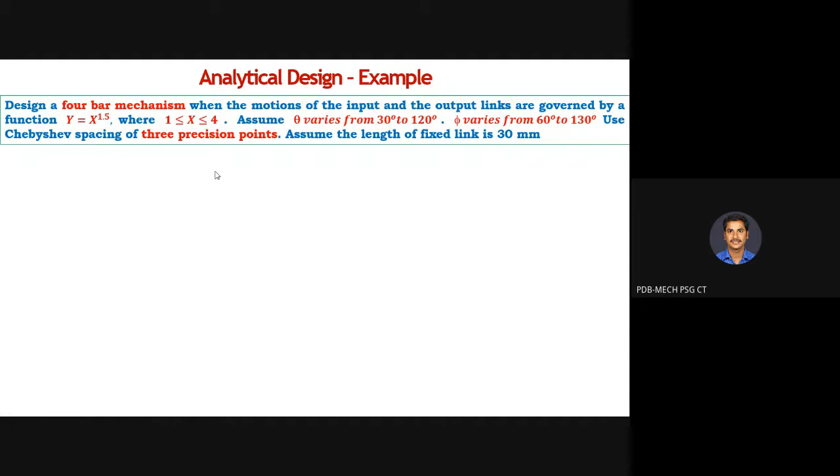Yesterday we discussed the Freudenstein equation for synthesis of a 4-bar mechanism using a function like y equal to x power 1.5, where x lies between 1 and 4. We completely solved this problem and got the solutions for the length of the links: crank, rocker, coupler and frame. Correct.

This is another problem. If possible, try it at home. Please make a note of this. Here, only the function is varying, that is y equal to 2x square minus x. That is the function varying, whereas other data is like x is varying between 0.

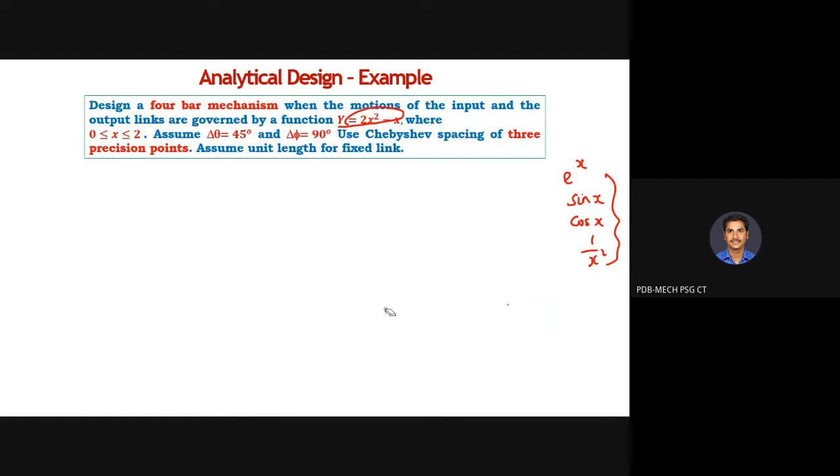It is very similar to the problem we have solved. Please make a note of this and you can try it at home.

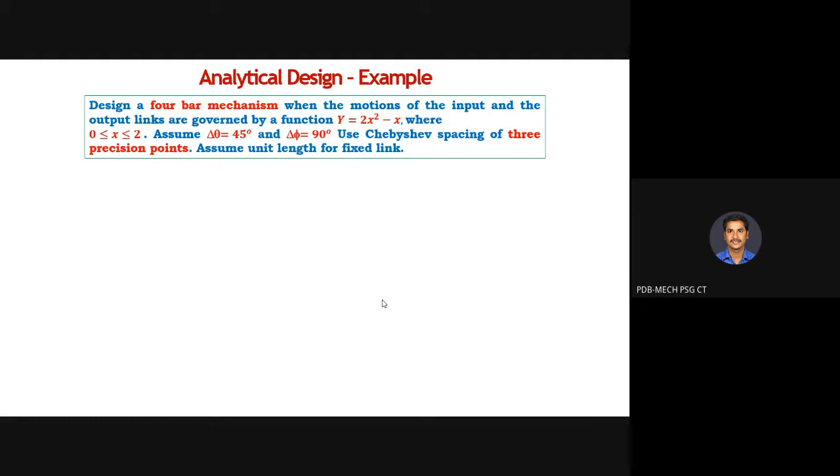Next, I am going to solve a similar problem related to slider crank chain, because the previous problem given for homework is also pertaining to 4-bar mechanism. So I don't want to waste more time solving the same 4-bar mechanism. Now we move on to a single slider crank chain mechanism, so you can get an idea how to solve those problems. Please read the problem carefully.

What is meant by slider crank mechanism? What is meant by slider crank mechanism? Please respond. What is meant by slider crank mechanism? In the inversion itself I explained.

Okay, what is a 4-bar mechanism? We have 4 links like crank, coupler, rocker and frame. So now can you define what is a slider crank mechanism? No response.

It has one slider and a crank with coupler. You can relate it as 4-bar mechanism and slider crank mechanism. Yeah, frame, crank, coupler and slider.

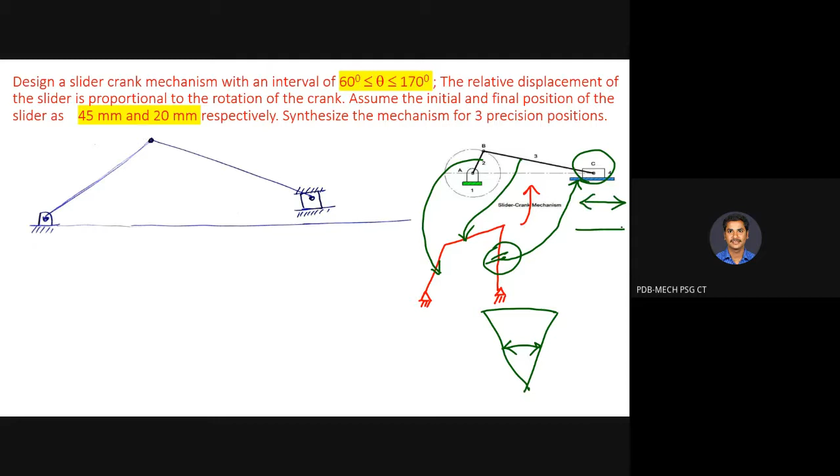That is the difference between the 4-bar mechanism and slider crank chain mechanism. So yesterday we derived a Freudenstein equation for finding out the length using the 4-bar mechanism. Now we move on to slider crank mechanism. Hope you understood what is meant by slider crank mechanism.

So here it is your crank, and it is your coupler, and it is your slider, and it is your frame.

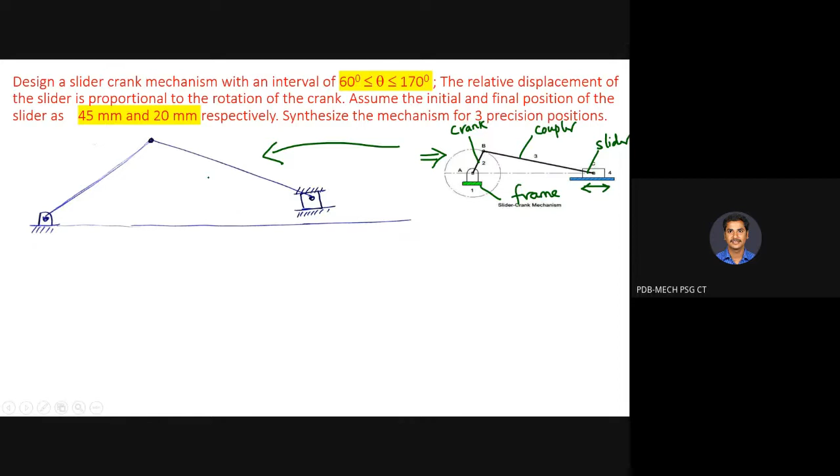So here you can observe, this is your crank, same problem - this is crank, this is coupler, this is your slider, and it is your frame.

What is the difference you are observing? Can you observe the slider is slightly shifted from the frame? Earlier in this case the slider is in line with the frame, correct? So this is the pivoting point of your crank with the frame, and this is the straight line. So in this case your slider midpoint is in line with the axis of your crank pivoting point with the frame, correct or not? So the point is in line. Yes sir. Okay, but what is the case in the actual problem?

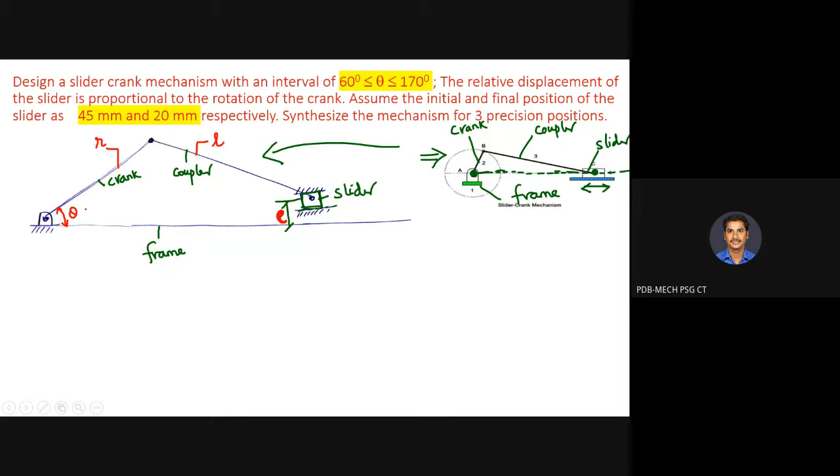Okay, so now what angle does your crank make with the frame? So some theta angle, let me denote it as theta. Normally in your 4-bar mechanism, theta is nothing but the input angle made by the crank, and phi is your output angle which is made by the rocker. Correct? Am I right or not? Yes sir, yes sir. Theta is your input angle made by the crank and phi is your output angle made by the rocker.

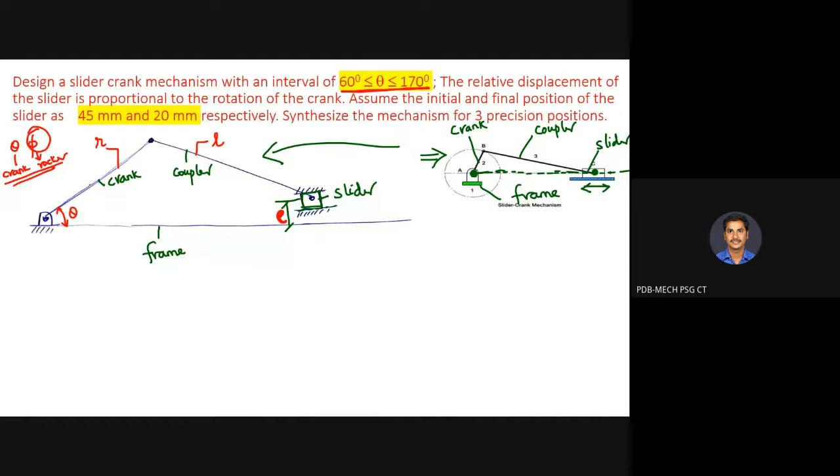The relative displacement of the slider is proportional to the rotation of the crank. So whatever displacement is made by the crank, it is going to be proportional to the displacement of the slider. So the crank rotates along this direction, and your slider makes reciprocation like this. Okay, so this will be relatively proportional. So we can write this in terms of an equation like delta x - delta x is the displacement of your slider, which will be proportional to delta theta.

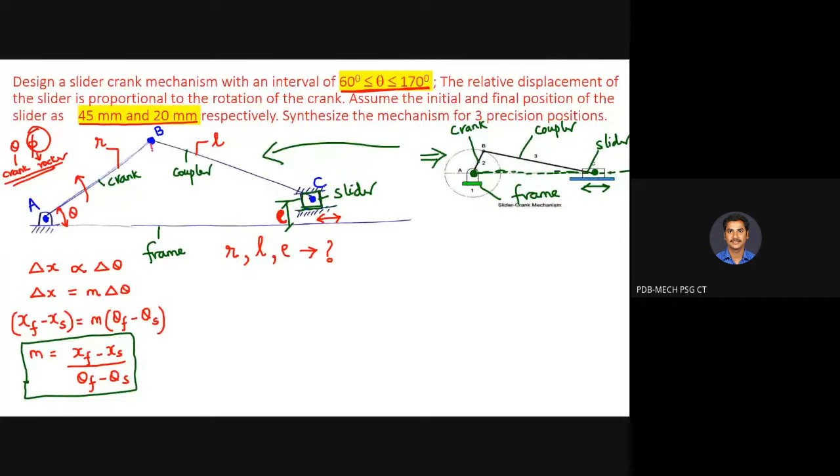Now I'm going to extend this point B in the vertical direction, till it touches the frame. Let me denote this point as P. Now on the horizontal direction from C, I am extending to meet this already extended line - there's a point where it meets, so I am denoting this point as D.

Is it clear? Why are we doing all this? In order to have a new equation for this 4-bar mechanism. Now I am going to consider the triangle ABP. First consider triangle ABP - where is A here? This point is your A, this is your B, and this point is your P. Now consider this triangle ABP. Tell me, what is AP? What is the value for AP?

What is AP? In a trigonometric relationship, you will be getting the value for AP. Theta is here, so AP is your adjacent side.

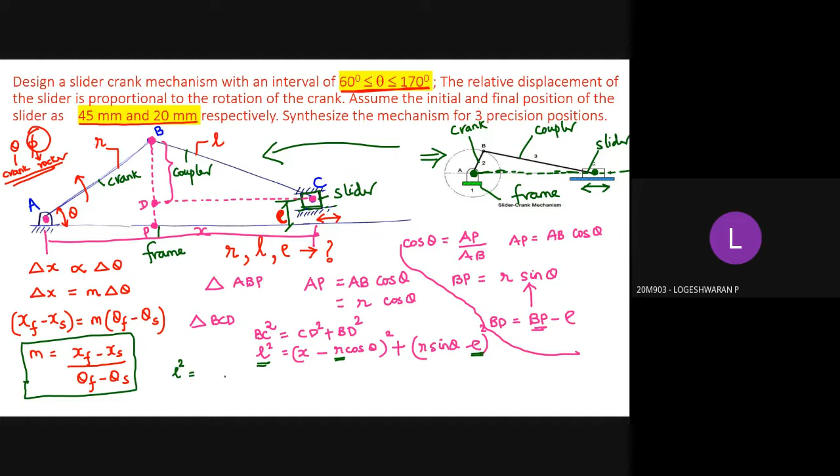Okay, now you expand this equation, because x minus R cos theta the whole square is here, and R sin theta minus E the whole square is here. Now you expand this. What do you get when you expand? L square is equivalent to X square

plus R square cos square theta. It is the A minus B whole square formula: A square minus 2 into A into B plus B square. So X square minus 2 into X into R cos theta, plus R square cos square theta, plus here also A minus B whole square applies: R square sin square theta plus E square minus 2 R E sin theta.

Correct? Yes, sir. Now look at the equation and tell me how can we simplify this. Look at the right hand side and tell me how can we simplify this. Is there any possibility for cancelling? Or look at any trigonometric identity that can be applied. Sir, sin square theta plus cos square theta equal to 1, sir.

Yes. Here this R square cos square theta and R square sin square theta can be combined, so that R square can be taken outside. Within the bracket you will be getting sin square theta plus cos square theta, it becomes 1. Okay, it is simplified like this. So x square plus it becomes R square, correct? Yes, sir.

Minus 2 into... here one more term is there, that is E square. So you bring it to the left hand side. So this particular term: x square plus R square plus E square minus 2 into R into x into cos theta, minus 2 into R into E into sin theta.

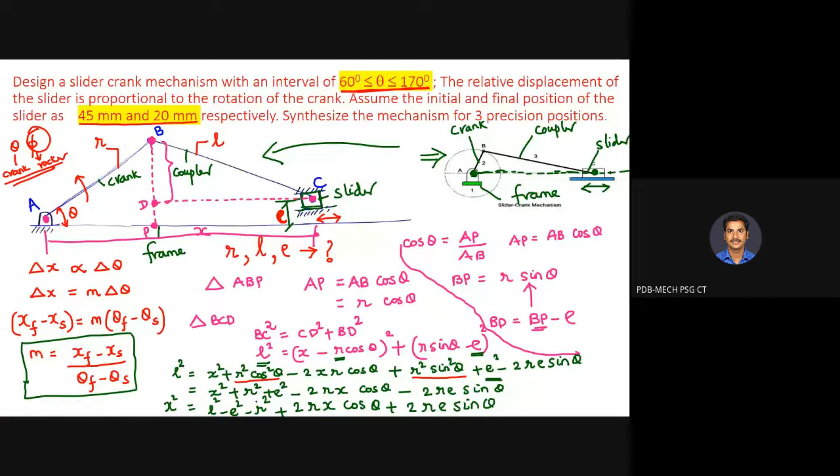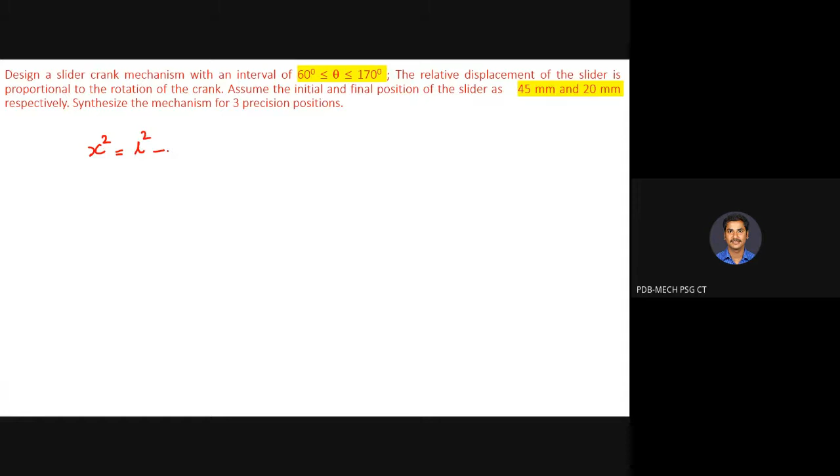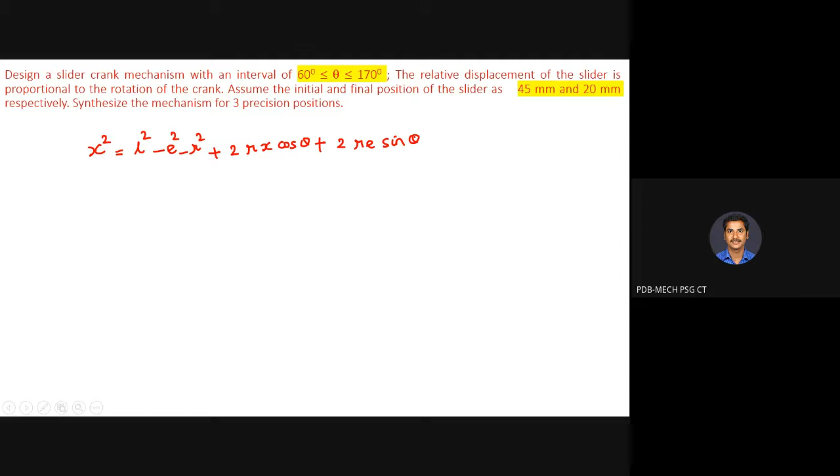Okay, next slide, let me write the equation again. X square is equivalent to L square minus E square minus R square plus 2 into R into x into cos theta plus 2 into R into E into sin theta. This is what I wrote in the previous slide. So let me keep these particular terms.

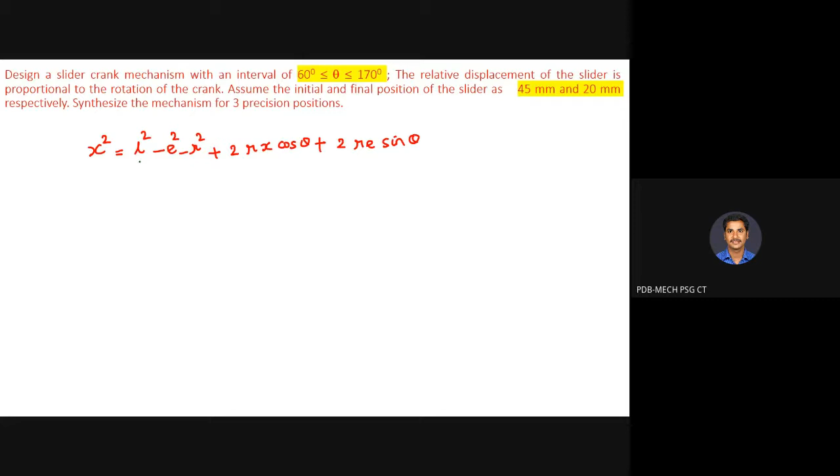In L, E, R, what do we have here? L, E, R - sir, we have to find theta. That has to be found, but what are they? They are going to be constants, correct? Constant, sir, because length of the crank, length of the coupler and the eccentricity are not going to change. Okay, so this constant term, let me keep it as K3.

Now here in the next term, what is constant? In the second term, 2rx cos theta, what is constant? 2r, because x is going to vary depending upon the crank rotation theta, x is going to vary. So x is not a constant, but 2r is a constant. So let me keep this constant as k1.

And in the other term, what are the constants? 2RE, sir. Yes, 2RE is constant. So let me keep this as k2. Okay, so let me rewrite this equation like this: K1 into x into cos theta, where k1 is 2r, plus k2 sin theta, where k2 is 2r into e, plus k3 which is nothing but L square minus E square minus R square, is equivalent to x square.

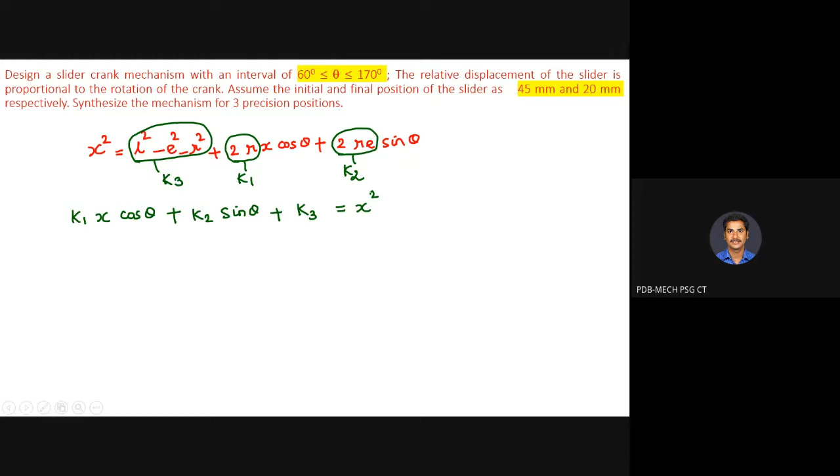Now look at this equation. Does this have any similarity to the Freudenstein equation we derived earlier for the 4-bar mechanism? It comes out the same way, yes sir - some k1 into cos, k2 into cos there but sin here, plus k3 as a constant equals some cos theta minus phi there, but x square here. That's all, it's the same type of equation. Let me write it here: K1 cos phi plus K2 cos theta plus K3 is equivalent to cos of theta minus phi. It comes out like this. Look at both equations - they are like the same.

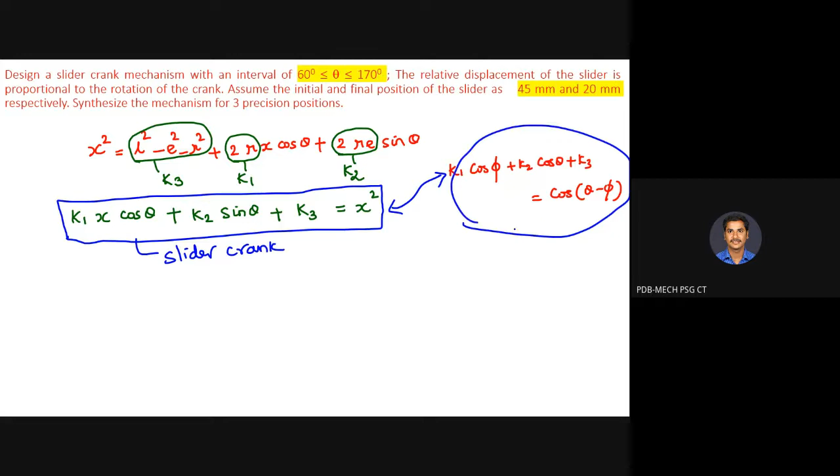Okay, but for slider crank we derived it like this. Is it clear? Yes sir. So this particular equation is applicable for the slider crank mechanism, and this other equation is applicable for the 4-bar mechanism. So depending on what mechanism is given in the problem, we need to adopt the appropriate equation.

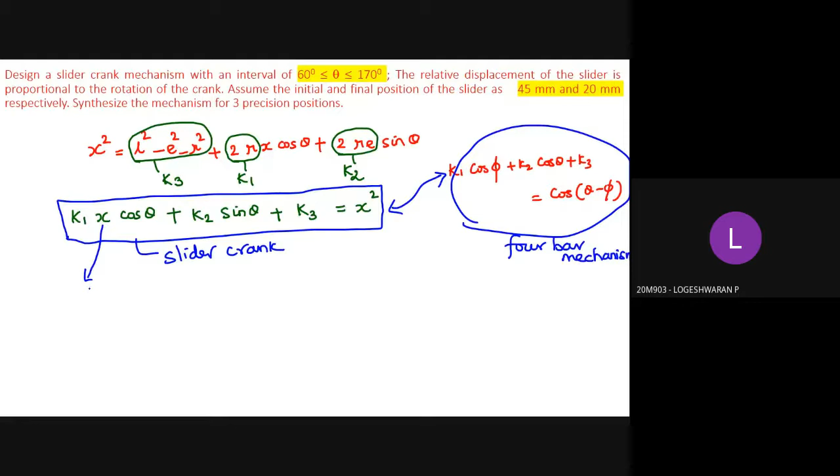Okay, in this equation, what is x? So it's the length between the crank and slider - x is a variable. This x indicates the displacement of the slider along the horizontal direction. Your slider is going to reciprocate, so it indicates the displacement of your slider. And what is theta? So it's the crank angle. Yes, very good - it is the crank angle. So here we derived this equation for the slider crank mechanism.

So just like we did for the 4-bar mechanism, we need to write the equation for 3 positions. Now tell me how to write the equation for 3 positions - how do we write this equation for 3 positions? K1 x1 cos theta 1, correct, plus K2 sin theta 1, plus K3 equal to x1 square. So wherever theta should be, theta is there, so theta1 is replaced as it is. Wherever phi should be, x is there, so like phi1, phi2, phi3, we replace with x1, x2, x3. That's all. Is it clear?

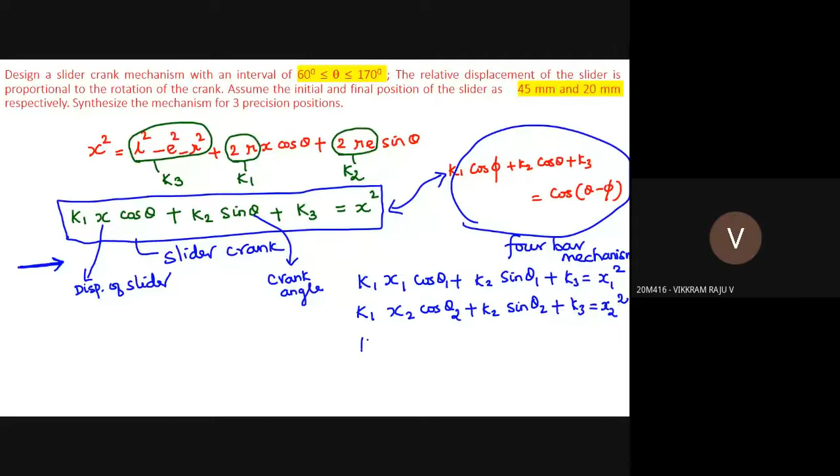Okay, shall we say the next equation? Second position: K1, x2, cos theta 2, plus K2, sin theta 2, plus K3 is equal to x2 square. For the third position: K1, x3, cos theta 3, plus K2, sin theta 3, plus K3 is equal to x3 square. Okay, now what is our next duty?

In order to solve this equation, we know what K1, K2, K3 are. K1 is 2R, K2 is 2RE, and K3 is L square minus E square minus R square. Once you find K1, K2, K3, you are able to find the dimensions of the slider crank mechanism, that is L, R, and E.

This can be found. So to solve this equation, what are the unknowns we are having here? Now to solve this problem, what are all the unknowns and what are all the known and unknown things?

K1, K2, K3 need to be found, so leave that aside. Next, Theta 1, Theta 2, Theta 3 need to be known. Then X1, X2, X3 need to be known.

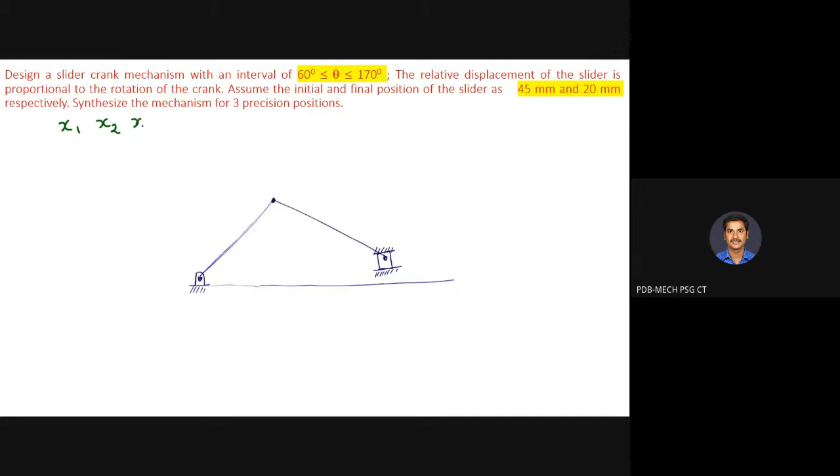Correct or not? Yes sir. Am I right or not? Yes sir, yes sir. So for solving this equation, we need to find out x1, x2, and x3. Similarly, theta 1, theta 2, and theta 3. So these are all the 6 variables that we are supposed to know for solving the above equation. Once we solve the equation, we can find L, R, and E.

Now tell me how to find out x1, x2, x3. Your theta is varying between what angle to what angle? Sir, 60 degree to 170 degree. It is varying up to 170 degree.

So which is the starting value? Theta 60 degree is the starting value, and the final value is 170 degree. Okay.

Similarly, x is varying between what and what? So 45 and 20 - the initial position and final position are 45 mm and 20 mm respectively.

In a 4 bar mechanism we relate theta and phi and write equations. Here there is no phi, so we are having displacement in terms of x. The initial position of x is 45 and the final position is 20.

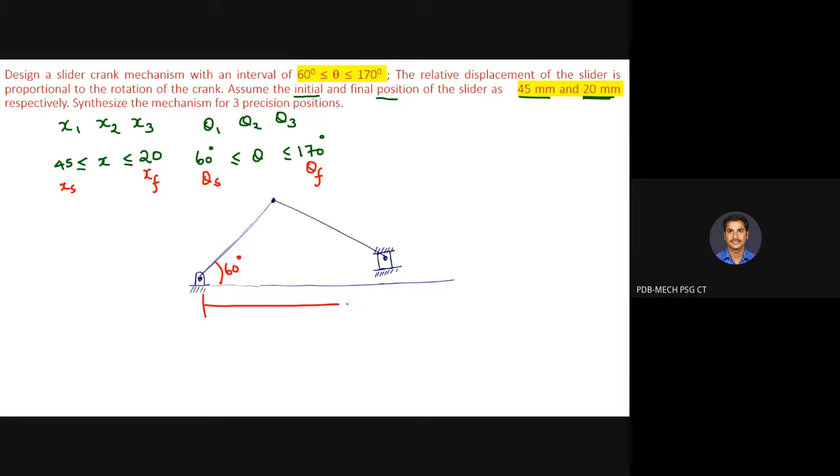So this is your x starting and this is your x final. If you ask why the initial position is larger and the final position is smaller, when your theta is 60 degrees...

When theta is 60 degrees, the distance between this point and this point is 45 mm. That is called the initial position here, because 60 is the initial position of the crank. So the initial position of the slider is 45 mm from this particular point to this particular point. Now as the crank rotates to 170 degrees, how does the slider move?

If it is rotating to 170 degrees, the slider reverses. I'm talking about towards left or right? Left, sir. Yes, towards left.

So when the crank is at 170 degrees, your slider may be in this position. This particular distance is your 20 mm. That is why it is called the initial position, and this is the final position. So xs is 45 and xf is 20.

So which is the input variable here? Which is the input variable? Theta, sir. Theta is the input variable or drive variable. It is theta - that is why we give input there.

So now we need to find out theta 1, theta 2 and theta 3. Subsequently we need to find out x1, x2 and x3. Okay, so now how can we find these?

Now, in order to reduce the 3 errors, which equation did I tell you to use? Error reduce - in order to reduce the structural error, what equation are you supposed to use? Chebyshev spacing, correct or not? And in Chebyshev spacing, 3 different values of theta and 3 different values of x need to be found.

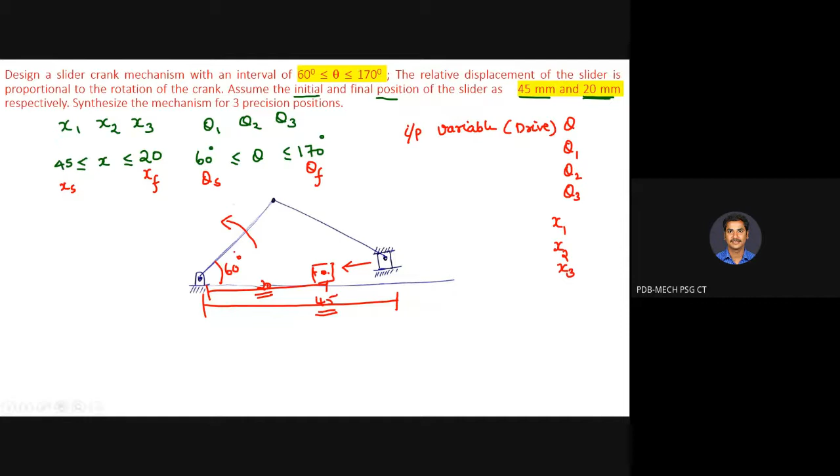Okay, now let me find out theta 1, theta 2 and theta 3 using Chebyshev spacing. So what is the equation for Chebyshev?

Sir, xj equals 1 by 2 into xn plus 1 plus x naught, minus 1 by 2 into xn plus 1 minus x naught, into cos of 2j minus 1 into pi divided by 2n.

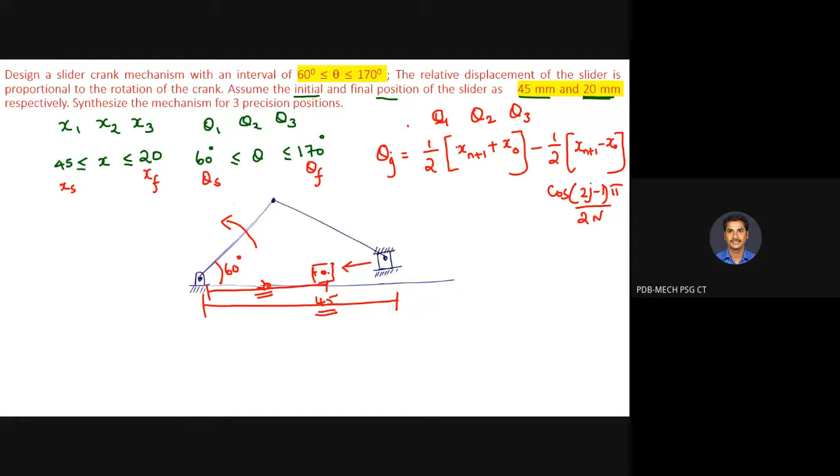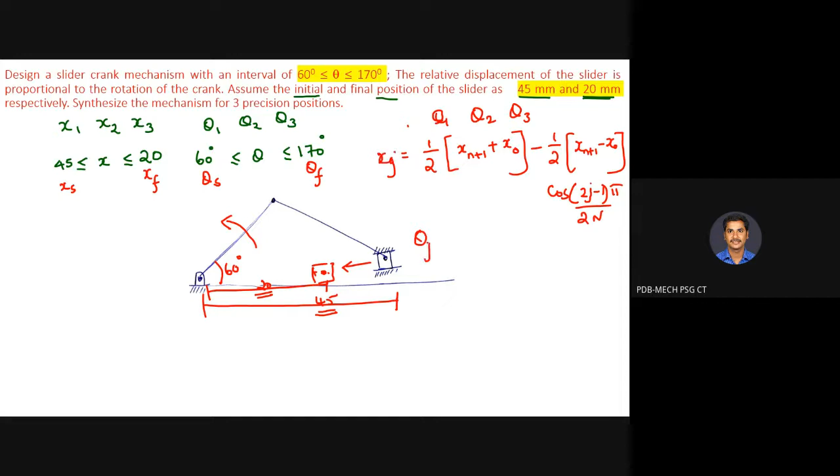So the equation you will be getting is theta j equivalent to 1 by 2 into theta n plus 1 plus theta naught, minus 1 by 2 into theta n plus 1 minus theta naught, into cos of 2j minus 1 into pi divided by 2n. Same equation - I just replace x with my field variable theta here. Now you can use the values to find out theta 1, theta 2, theta 3.

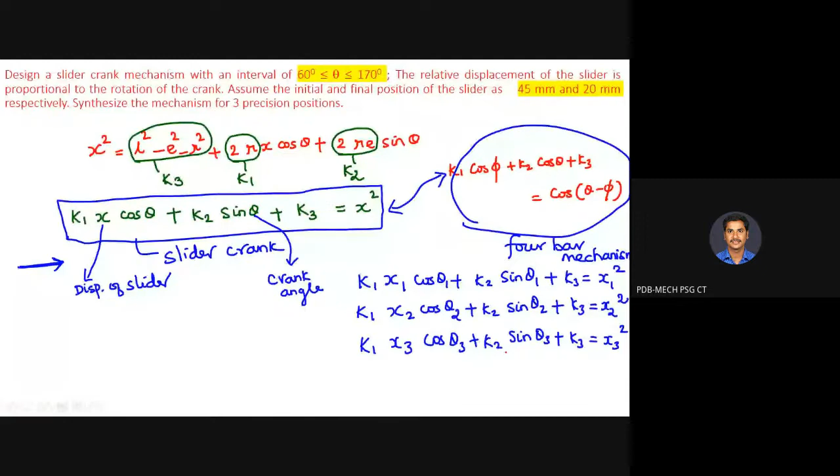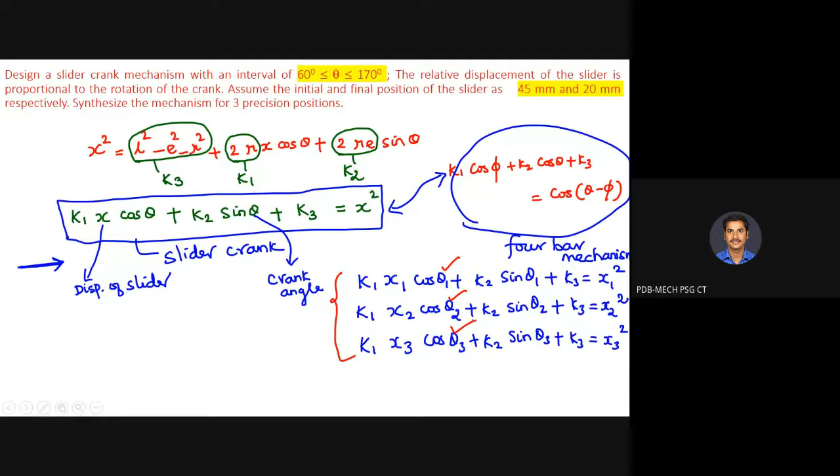Very good. So in order to solve the above equation, like Freudenstein equation, that is these three equations, we got the values for theta 1, theta 2 and theta 3. What is left? x1, x2, x3 sir. Very good. If we find x1, x2, x3, the problem is over and we are able to find out the values for L, R and E. Now tell me how to find out the values for x.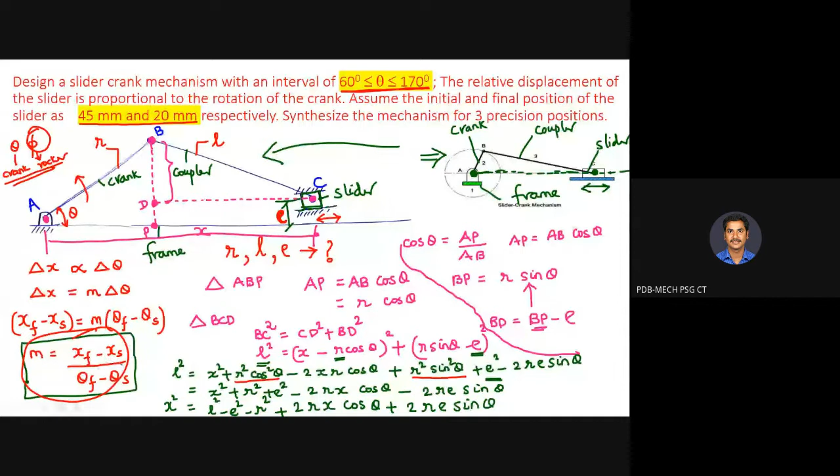So already one equation we derived, that is del x is directly proportional to del theta, so we got one equation like m equal to xf minus xs divided by theta f minus theta s. So in the very beginning I derived this, correct or not? m is equivalent to xf minus xs divided by theta f minus theta s. We got this, didn't we? So now we are going to use this equation for finding out the values for x.

Now tell me what is xf? First let's find out m, after that we can find x1, x2, x3. What is xf? 20, sir. Yes, final value is 20. Starting value is 45. xf is divided by theta f, 170 minus 60. Now tell me value for m.

The value for m? Sir, minus 0.227. Okay, make it minus 0.23. Okay sir, m க்கு 0.23 வச்சுக்கணும்.

Now the same equation what we have written here, I'm going to slightly modify to find out x1, x2, x3. So what I'm going to write is xf minus xs, that is equivalent to m into theta f minus theta s. Is there any change? Same equation but written in this form. Correct or not? Yes sir. Okay, now I'm going to substitute the values for f.

இங்க f க்கு பதிலா நான் x1, x2, x3 எனக்கு வேணும் அப்படின்னா this equation can be used. So f க்கு பதிலா I'm going to substitute xj minus xs, that is equivalent to m into, similarly theta f க்கு பதிலா theta j minus theta s. So in the j க்கு let me substitute the values for 1, 2, 3 so that I can get the value for x1, x2 and x3.

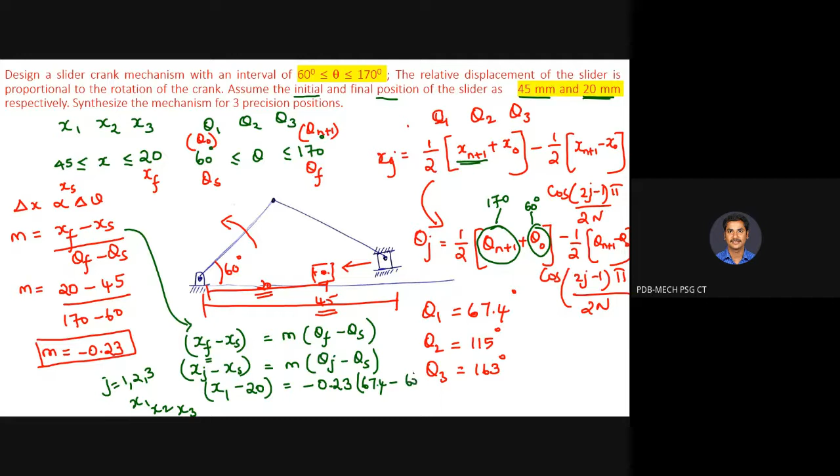Tell me the value for x1. Sure, xs1... 45 or 20 வரும்? Starting value வரும், I'm sorry, it is 45. Very good. Yes, 45 only, correct. It is 45. x1 minus 45, that is equal to minus 0.23 into 67.4 minus 60. What is the value for x1?

Just make it fast, this is simple calculation. 43.3, sir. Very good, 43.3.

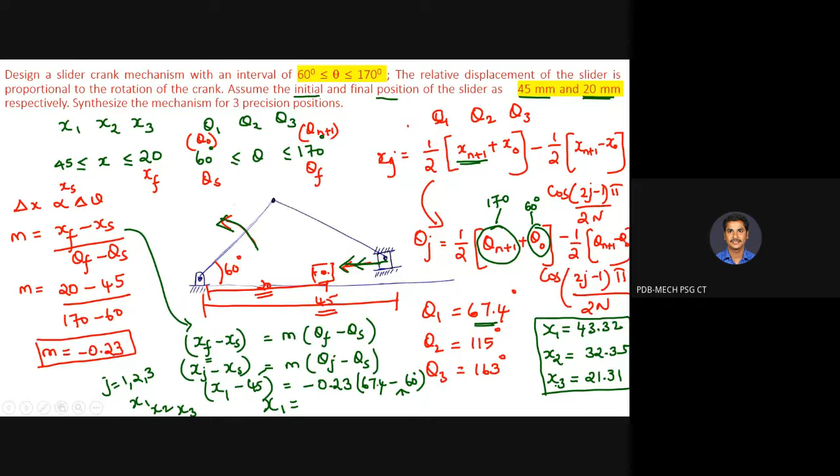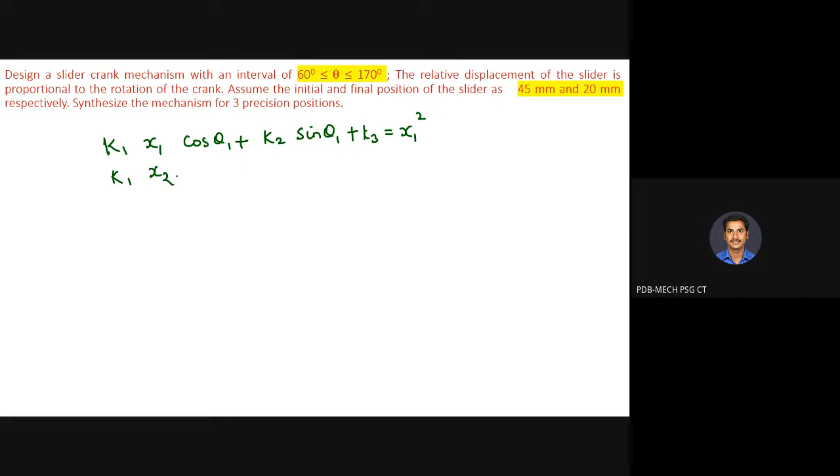So we got all the values for the Freudenstein equation: theta 1, theta 2, theta 3, and x1, x2, x3. Now I think you are able to solve the equation, that is k1 x1 cos theta 1 plus k2 sin theta 1 plus k3 is equivalent to x1 square. Hope others learned how to solve 3 equations, 3 unknowns using calculator.

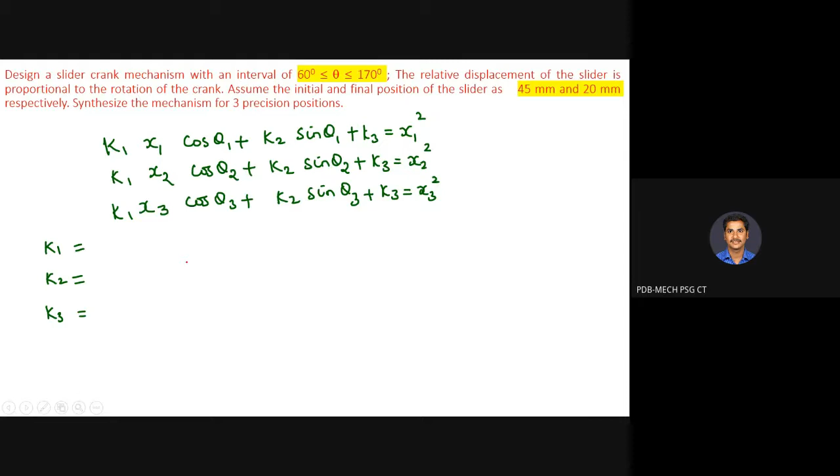Tell me, anyone, the value for k1, k2, k3 on solving the above. Anyone who got the value for k1, k2, k3?

Roll number 903, please unmute and tell me. Roll number 20M903. No sir, I don't know sir. Three unknowns, three values, you don't know how to solve?

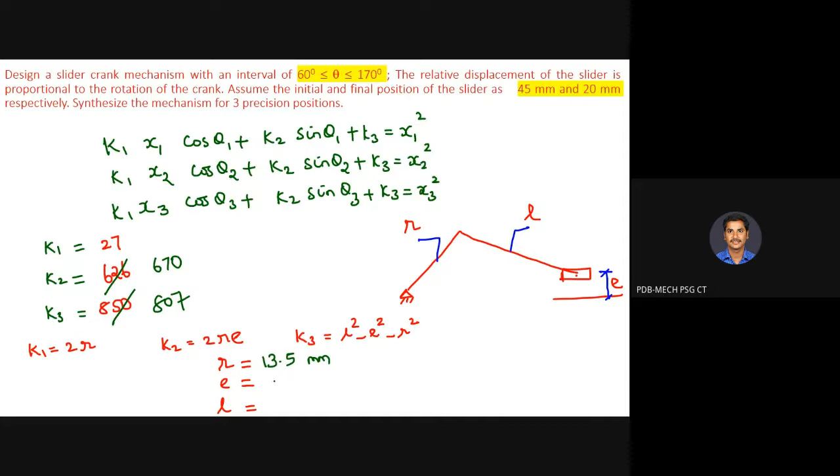L, I don't know the answer. You are giving the answers. I did not check the final answer. Just verify and tell, what is the value for L?

Value for L? Sir, 35.22.

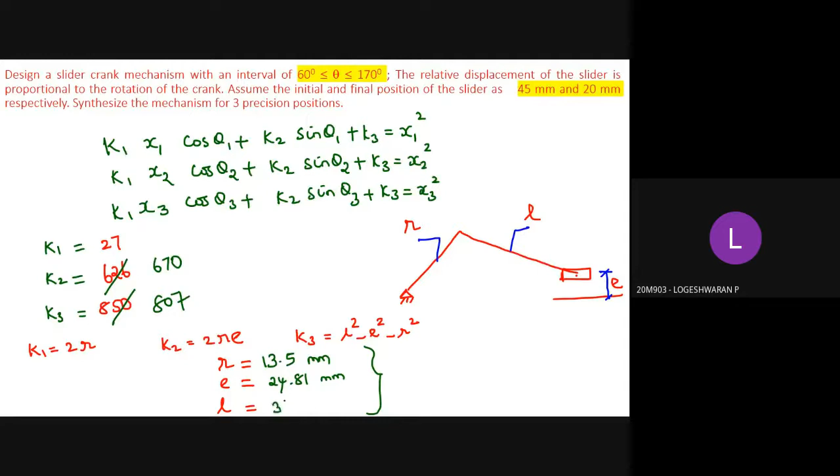35.22 mm. So these are all the values we are getting at the final Freudenstein equation output. So R is 13.5, E is 24.81.

Check E only, I think it is wrong. E seems to be coming too large. Please make a note of this and check. And L is okay, 35.22.

Remaining topics we can discuss tomorrow. Any doubts?